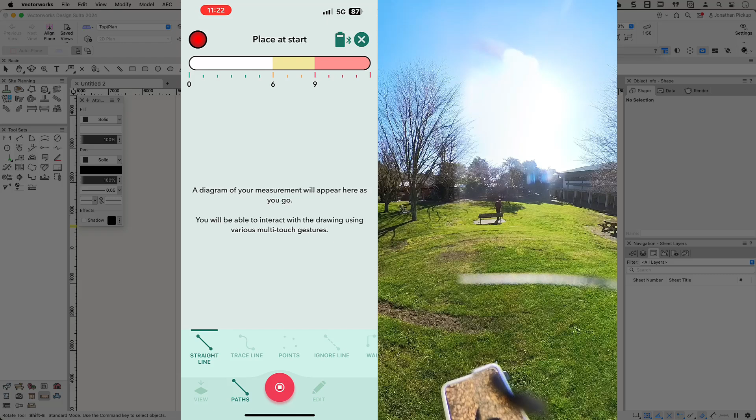First thing to do is to plan out where you're going to measure, and then you need to start measuring the site. Now I've started where that chair is so that I'll be easily able to come back to that very spot. That was my start point. I used the edge of the concrete to make it easy to find, and then I gradually went around and measured it. Turns out that I made a couple of mistakes.

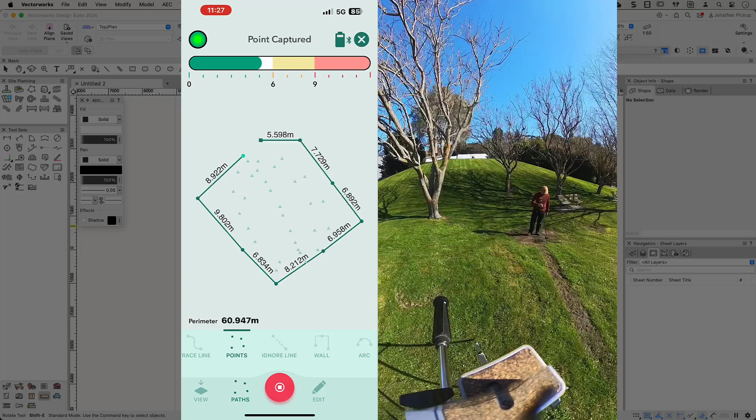I wasn't very quick when I measured it. I know it looks like I'm quick here, but I needed to move quicker. The other thing was I accidentally kicked it, which really upset it. So there were a couple of things that I needed to do to speed up or to improve what I'm doing. So here I am just finishing off the measuring.

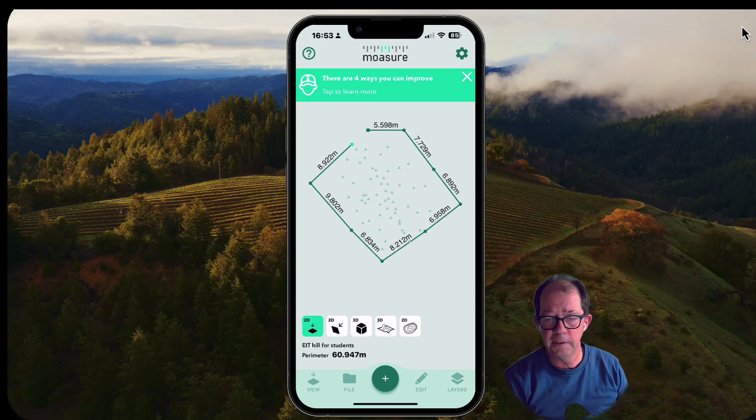Now that I've finished measuring, my Moasure device is telling me that there are 4 ways it thinks I can improve. So let's have a look through those. So first of all, you can see there's a blue highlight. I accidentally kicked it, or I accidentally bumped it against the ground. And I was quite careful most of the time, but I got a bit carried away and I did make a mistake there. There's another thing here where it says try to move your Moasure device faster.

So I was a bit slow. I wasn't very accurate about where I was placing it, or I wasn't definitive. So I needed to be more confident about the way that I moved and the way that I put my Moasure device down. Set your Moasure device down more quickly. So you need to be very decisive about placing the Moasure device down quickly and speedily and not move it. And there's some great videos on how to hold it so that you get a really good accurate reading. And also, would I like some help?

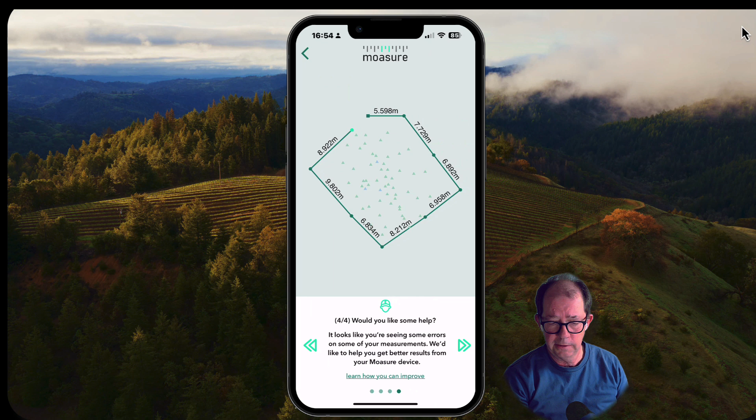So let's go back. So here's my device, here's my settings, here's my little hill. It's not very high. I thought it was much higher than this, but it's only 1.2 meters high, about 4 feet. And so what I'd like to do is export this information. There's a couple of different ways that I can export it. I can export it by tapping the export button here, and I can export it to a PDF, and I get loads of options. What do I want to put on the PDF? So I can choose these options.

We've had a look at the 2D. There's the 3D there. You can see I can export as a DWG or a contour, and the CSV. Now the CSV, you'll notice I've turned off a lot of the options on my CSV export, and it really does improve what I get through. So I've got include ignored points. I didn't include those. I've got the point type turned off. All I really want is the column heading and the point number for each of these. Be really handy to have the point numbers.

So tap on the export and you can get an export from that. So there's lots of different ways. If you want to export the MFL file, that'll allow you to give it to somebody else with a Moasure. You can export the image file and so on. So these are things that are really handy for exporting. Now I've exported the CSV and I'm going to import that into Vectorworks and see how that works.

So once you've exported your CSV file, you can open it in Excel and check out that we've got the point, we've got the X, the Y and the Z. So this is easting, northing and elevation, and we need to remember that. I've got about 70 points here. That should be enough to import this and get a good site model off it.

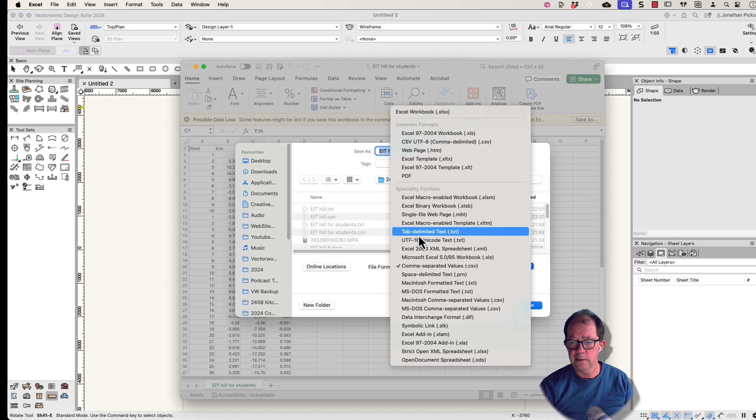And I'm going to just remember that that's X, so easting, northing and elevation, then file, save as, and save it as a TXT file. So you can see I've got one here. I'm going to save as a tab delimited text file. There it is there. So tab delimited text file. I'm going to save it into my project. I've actually already done this before just to check it out. And I'm going to cancel that.

Now I can go back to Vectorworks. I need to import this information. So AEC on the menu bar, survey input, import survey file. So now I just need to find my file. It's the EIT hill for students. So remember, it's the TXT, not the CSV file. Let's open that. There's my lines there.

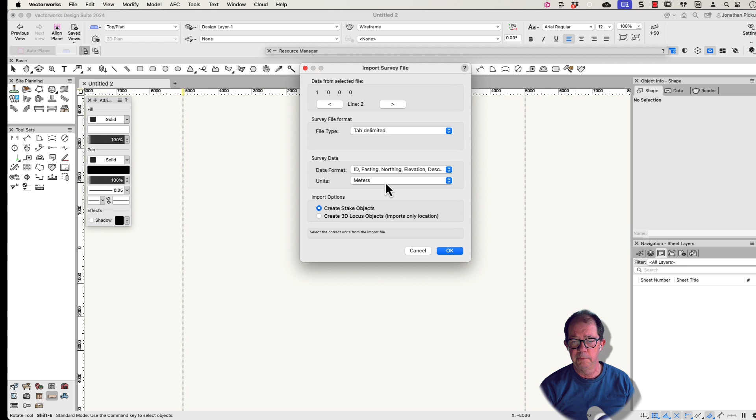I can just check through. So that's the first one, 0, 0. It's tab delimited, not comma delimited. If you're using a CSV file, you need to use the other with the comma delimitation. So tab delimited, ID, which is the point number, easting, northing, elevation, and my units were meters in my Moasure tool. I'm going to create stake objects, so okay to that.

I'm just going to skip that error and we're going to have a look. So include as site model data, yep. I want this to be a cross. The cross is my favorite. I want elevation, document units, and I think everything's okay. Let's go okay. So it didn't take very long. There's all my points. Let's have a look.

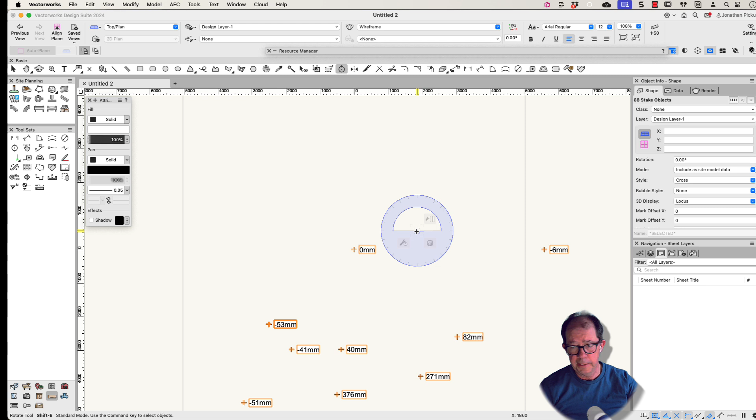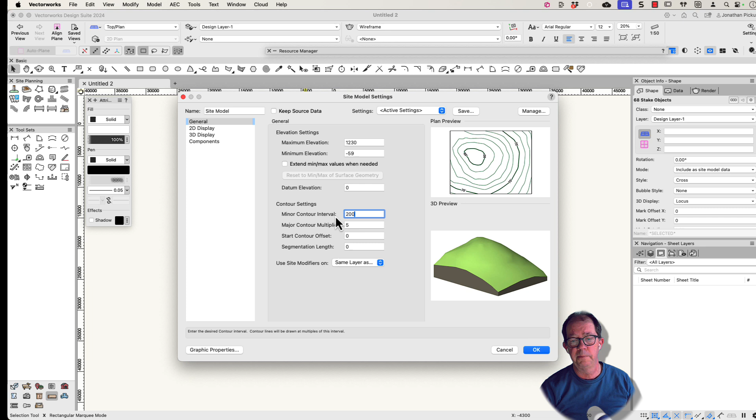So they're all there. This is where I started at the top here. This is the top of the hill. This is where I had the camera. And we've got those all selected. So I can go up to here to AEC and I can choose terrain and site model from source data. That's my maximum elevation, that's my minimum, and true, it was below 0. And my contour interval, 200 millimeters, with a multiply every 5.

And there it is, there's my contour plan. I'm going to make existing only, so there we are. And if I go to a 3D view, you can see there's my little hill. It really doesn't look like much, but it wasn't very high either. There is a little bit of a lump here, and there's a couple of points here that were around about the same amount. So I'm going to go back and recreate from source data.

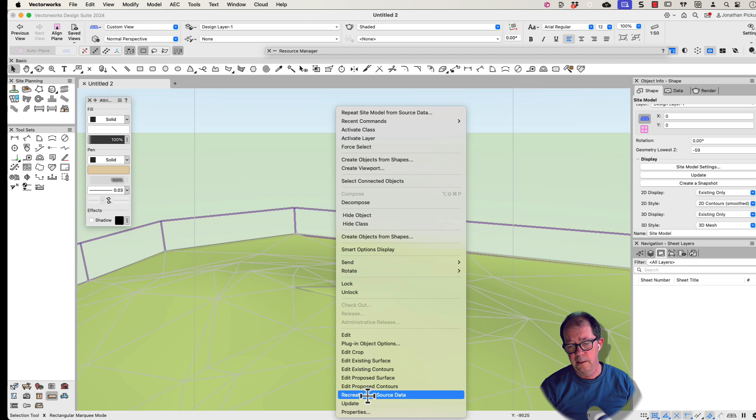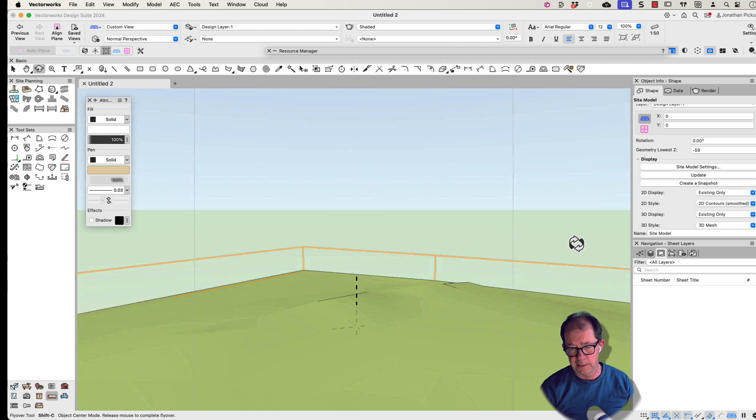Let's have a look. I did notice there were 2 spot levels that were really close together, just in this area here. So I've got 2 spot levels. I'm just going to move one out of the way, and you can see there's a big height difference there between one and the other. I'm going to delete that one. I'm not sure why it was so close, but if I delete it, let's recreate from source data. It's got rid of that funny little lump, and there's my little hill.

So that's how we can get our Moasure, how we can measure it, how we can get into Vectorworks, and then we can use it. And it's really cool. There's a movie I made recently showing a much steeper hill.